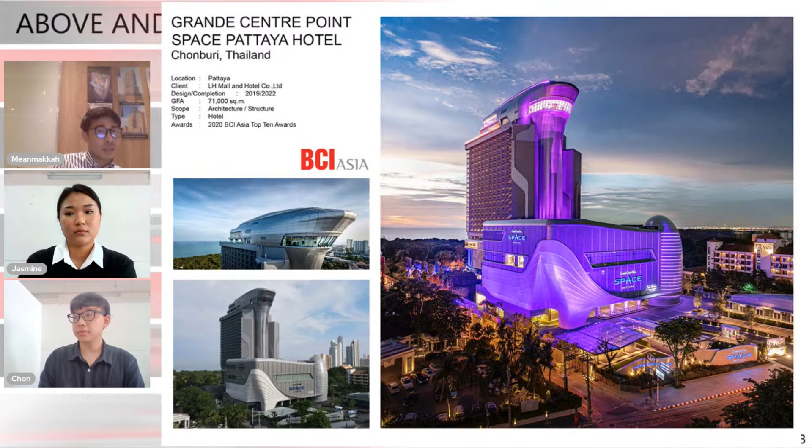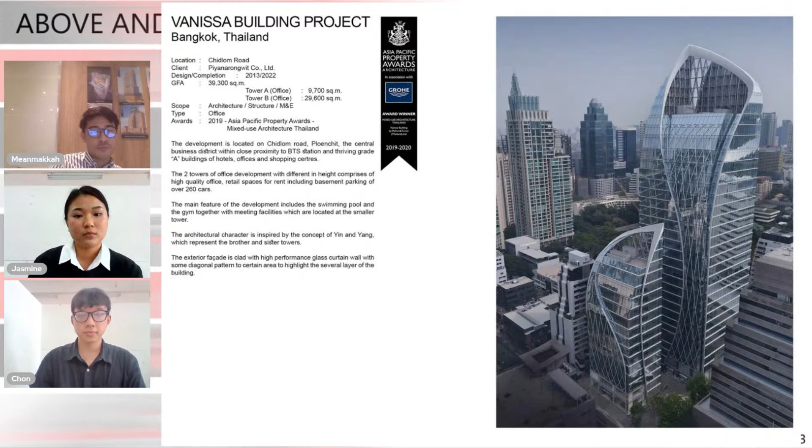As you see the projects of Palmer and Turner, I think approximately 90% are high-rise buildings in Thailand and overseas. This is a sample project that has been finished in Bangkok. This is interesting, right? Yeah, it is.

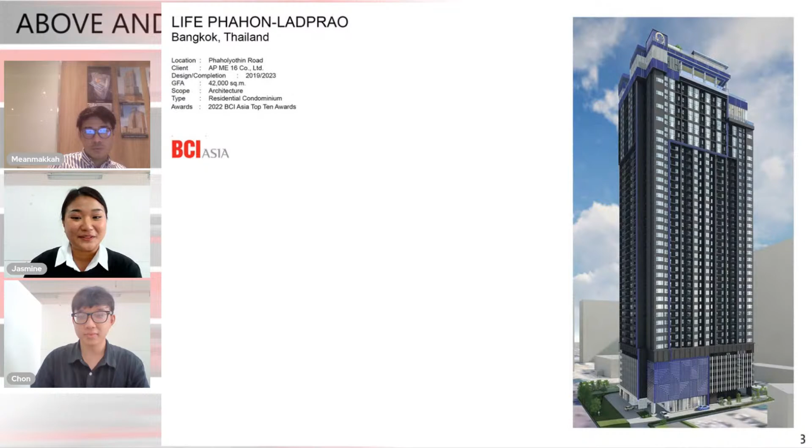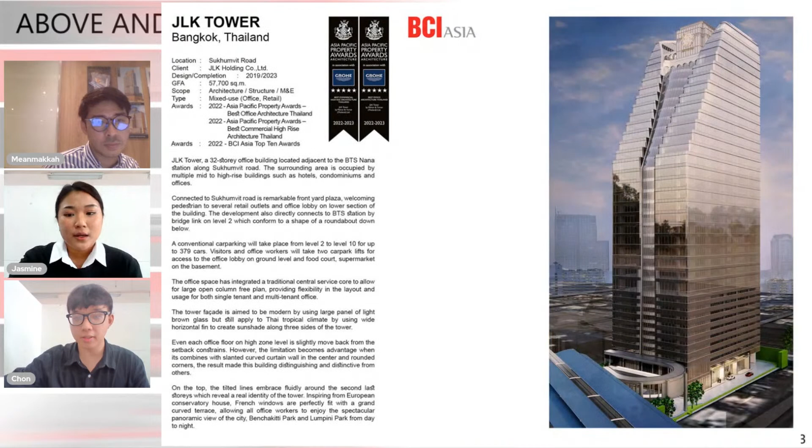It looks really amazing, such an interesting background, and I think we actually have a lot of questions to ask you today. Shall we start, Chon? Yeah, I agree with Jasmine. Let's get into our seminar topic, above and beyond. For me, I actually have a question. What actually inspires you to do high-rise building projects as an architect, P. Tom?

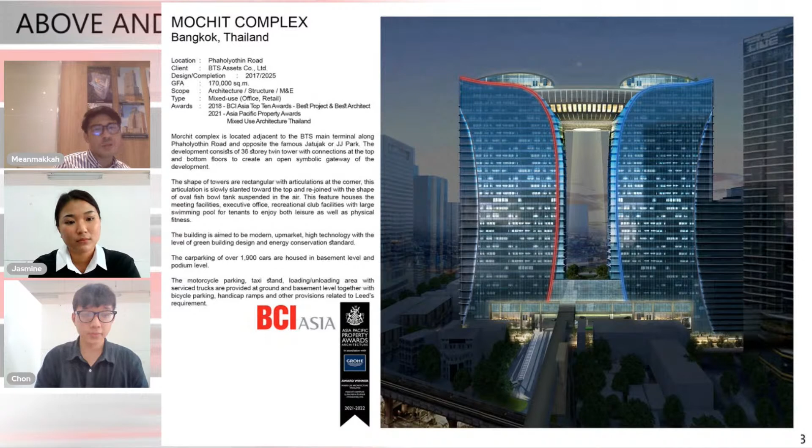Oh yeah, inspiration. So I had a lot of inspiration as an art student in architecture, but more for high-rise buildings. When I was a third year student in architecture, I went to Singapore on a field trip. I visited the One North site project, which is designed by Zaha Hadid. Everyone knows she's a legend. Yeah, that was interesting. But I was more interested in the high-rise buildings.

When I stood in front of the skyscrapers around Raffles Place in Singapore, maybe someone has already been there, it was huge and beautiful. The glazing facade reflected the color of the sky. I thought to myself, can I do that?

But how? What I need to concern about the high-rise building, the skyscraper. But I have already answered now. I already work with it, and I already built the high-rise in Bangkok, and maybe more in the near future.

Wow, it's like you have a lot of experience about that, in Thailand and abroad as well. So should we go to the next question, Chon? Yes. That sounds really extraordinary to me and sounds quite difficult. And lots of obstacles could occur during that project. And what about the unexpected problems, like delayed shipping?

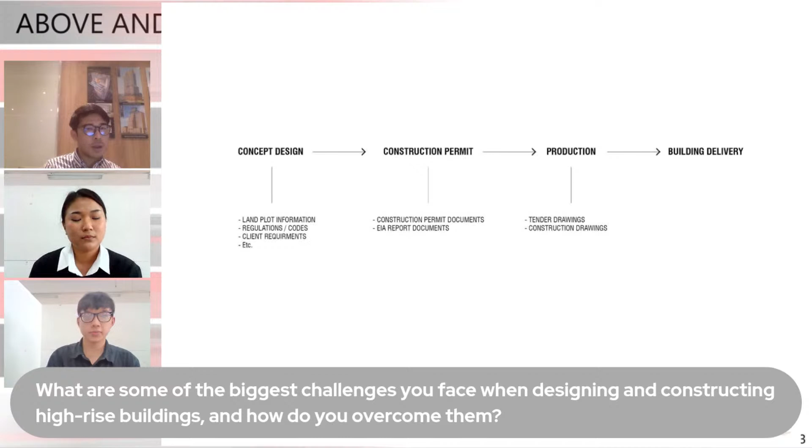So may I ask what are the biggest challenges that you faced with the design and construction of high-rise buildings, and how did you overcome them คะพี่ทอม? Okay, so I prepared my presentation. Maybe it suits the question. So for the design of the high-rise building, I need to present this slide.

The first stage of the design of a high-rise building is the concept design. We need to know about the land plot information in Thailand. In the land plot information we have the regulation. We have the client requirement, which function they need, maybe an office building, residential building or hospitality. After that we need to prepare the construction permit documents and the EIA report. This is important also.

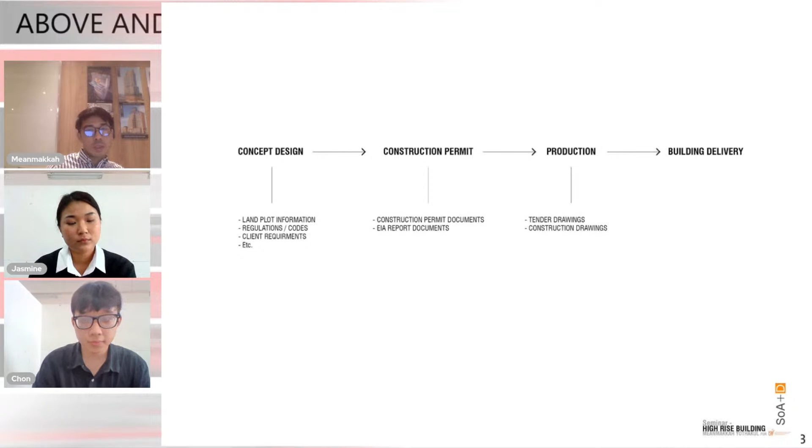And after that, the production documents for the tender drawings, which will be used for bidding the main contractor to build this high-rise building, and then the construction. It's also important to build the building. And after that, we finish the work. This is building delivery.

After that, we will talk about the land plot. The land plot, which concerns the urban code. We will know how many square meters the land plot can build, and also which function we can build.

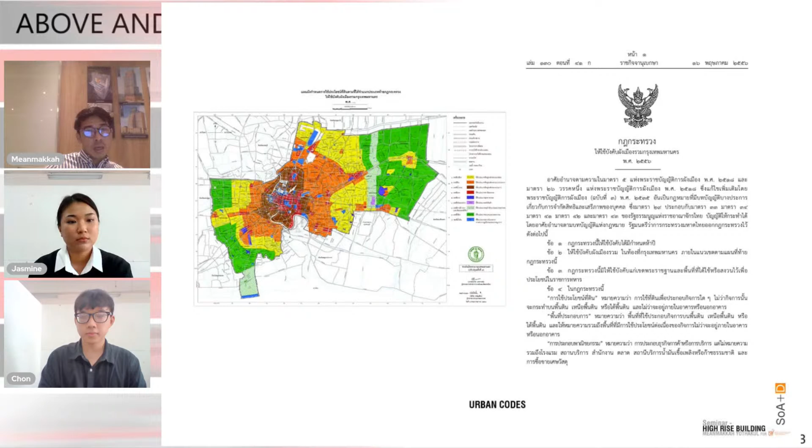And after that, I have a sample project in this slide. For this land, as you see in the slide, we have FAR in the urban code. It's 10 to 1. If the land plot has maybe 8,000 square meters, you can multiply by 10, and after that you will know how many square meters you can build on this land plot.

And after that, you have OSR, the open space ratio. On this site, we need open space for maybe green area, or the circulation of the wind, or the sunlight, something like that.

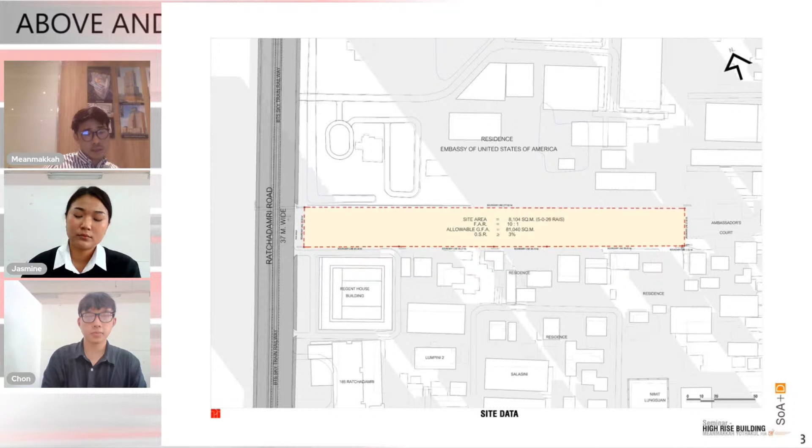And after that, building code. After urban code is building code. This is important also. We need to know about the code for the design stage: how many meters we need for the staircase, how many staircases we should have in the building, something like that.

For this slide, I need to present the setback of the building. It's also important in the building code. The building is here and the road is here. We need a 12 meter clear setback so the fire truck can go directly from the road to the building. And after that, we need 1/6 of the building perimeter for the fire truck to be close to the building, and a 6 meter setback around the building so the fire truck can go around the building.

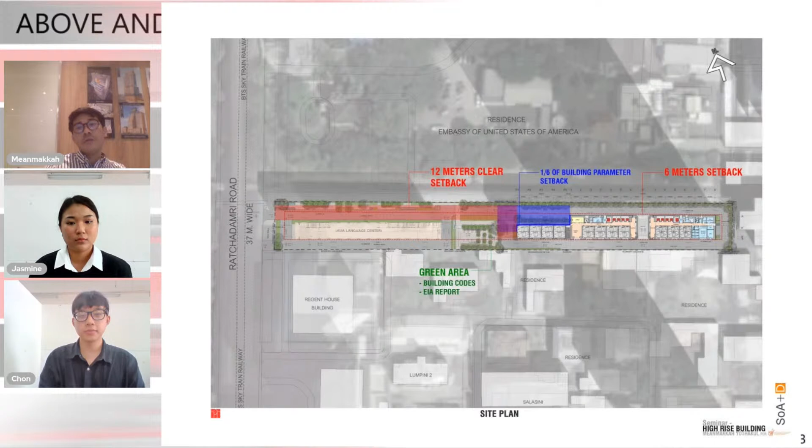And also for the EIA report, we need to be concerned about green area. There are two types of green area. The first is the sustainable green area, and the second is the water permeable green area. This is marked in the EIA report, and you will know more in the details later.

And also, we need a shadow setback. This is important for high-rise buildings, so that sunlight can touch the ground. So we need this shadow setback. We can build the high-rise building so it does not exceed the shadow setback.

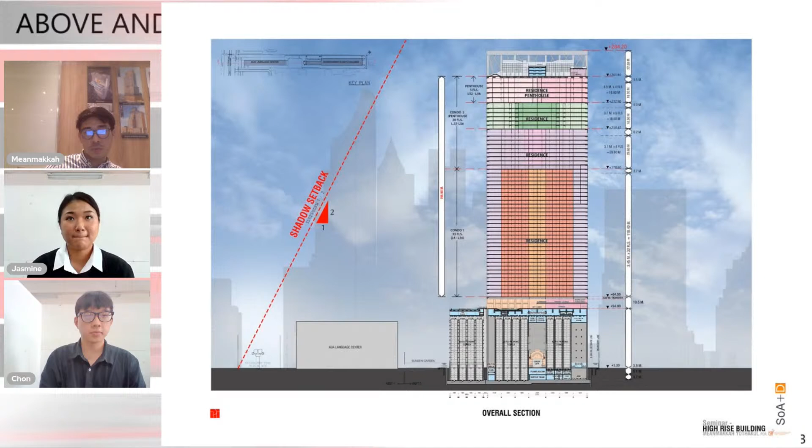And also for this slide, in terms of vertical transportation, this building has 8 passenger lifts and 2 fireman lifts. For the fireman lift, the speed requirement is 1 minute from the first floor to the top floor.

And also in this building we separate the lifts into parts. The violet one is the low zone and the high zone is in green, because the capacity of the lifts is different, depending on the function and the requirements of the case and the client.

And after that, we need to be concerned about the MEP transfer floor. Every 100 meters of building height, we need 1 transfer floor to transfer all of the pipes of the mechanical system, and also structure. The building has 1 floor for structural transfer and 4 transfer floors for the MEP.

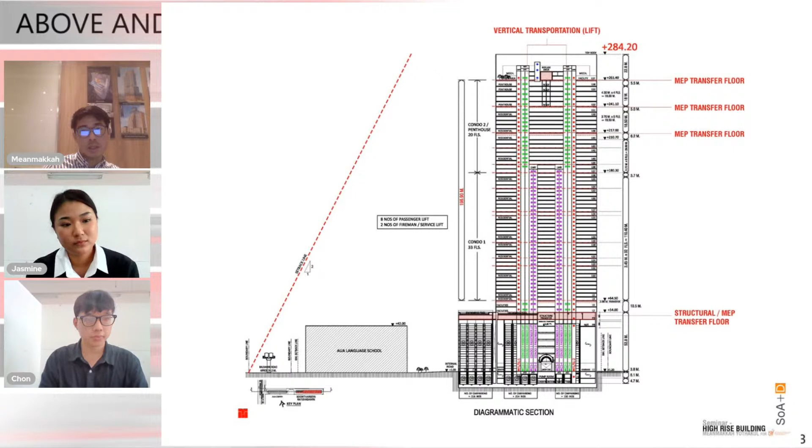And after that, we need the wind tunnel test. In Thailand, we have 2 locations where we can have a wind tunnel test. The first one, I think, is in Thammasat City, and the second one is in Chulalongkorn University. But in this project, we had a company in Italy do the wind tunnel test.

What is the wind tunnel test? If your building is more than 150 meters tall, we need a wind tunnel test. From the wind tunnel test, we will have results for the wind load that will impact your facade and your building. As we know, every part of the building has results. There is a number, and the highest number is the most impacted by the wind.

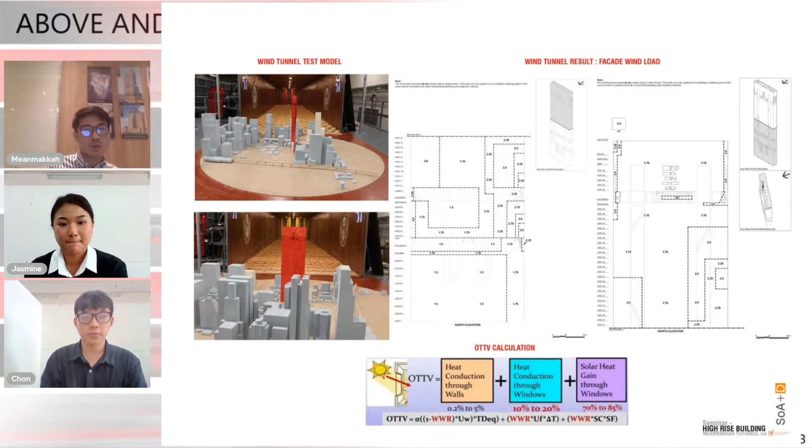So if your facade is glass, we have to specify glass for that part, maybe thicker or stronger glass. And also the wind load will impact the structure of the building. This shows how the wind will impact the structure. You can see the building will move in every angle, so the structural engineers will know to put more concrete or steel in some parts of the building to make it stronger.

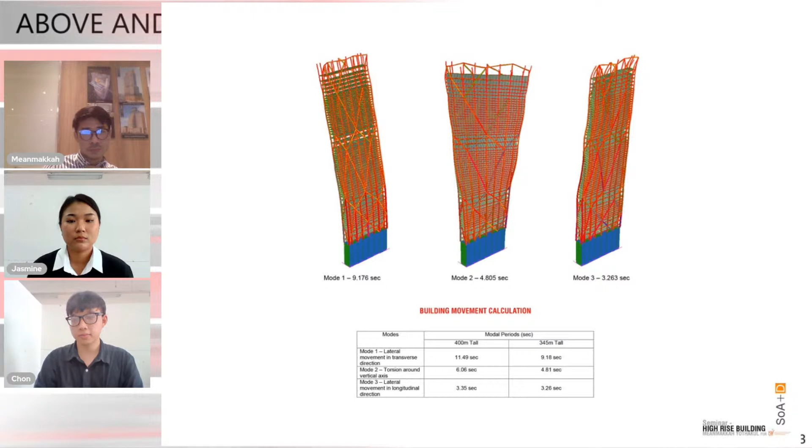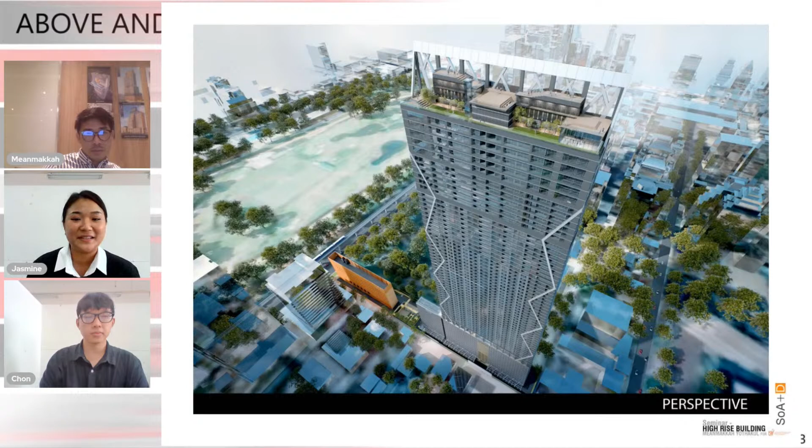Wow, it's really interesting, and thanks for your explanation. I can see the process of the high-rise building clearly in your slides. And it's really hard to handle, because you actually have to talk with people in many positions and work as a team, not just one person, to make it happen. A lot of things happen there, and it sounds so difficult. I can't imagine doing that project alone in the future. But listening to you, Tom, your explanation of the slides is so clear.

And another question: as architects, we always stay in charge of the design part. But is there another role for us to deal with?

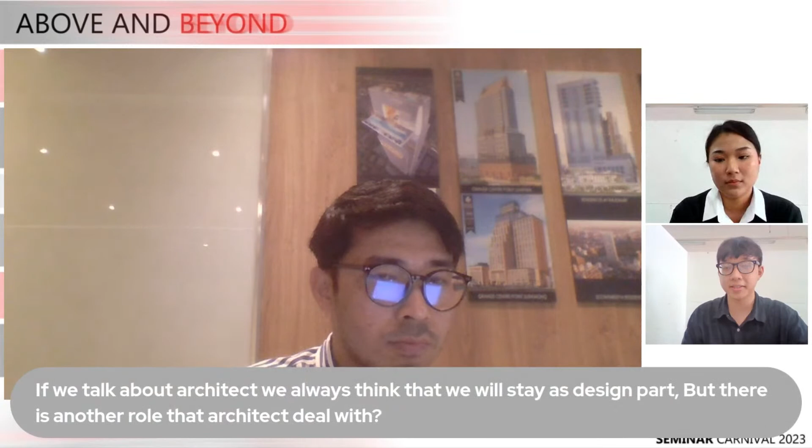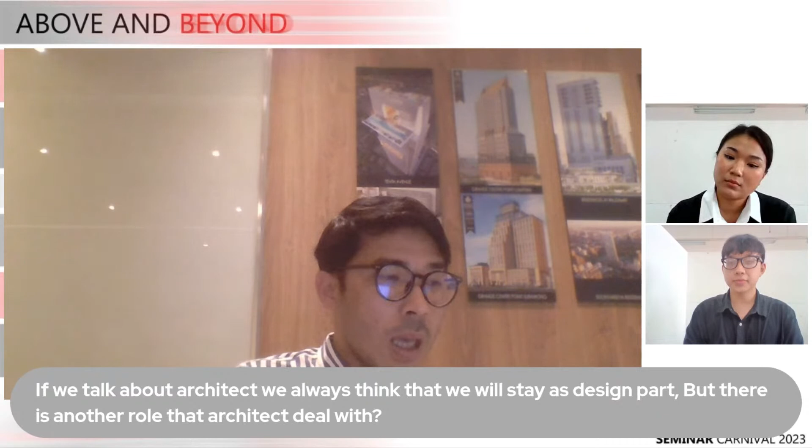Yeah, as we know, the architect is the first person or the leader of every building project, right? From the first step to the final stage of the building, the architect needs to be attached to all parts, like the design part, construction part, or other parts of the project. That means the architect must know all the needs from the client, from marketing, from structural, mechanical, interior design, landscape. We need all the information to design the most functional space. Also, the architect is like the coordinator in the construction stage.

The first drawing that the main contractor will check is the architectural drawing, the first priority. This drawing is from the architect, and that's because it's the combination of all information. So for me, the architect is not just a designer. The architect needs to be construction-law capable. The architect needs to know about all the codes and regulations and also the marketing. We need to know about marketing. Why? That's because we need to serve the people who will buy and use the building.

And the architect is like a combinator, the combinator of all information in this project, in all projects, and also like QC, quality control. We need to check every piece of the building, whether it's built like the architectural drawing or architectural design or not. And all of that makes the architect the leading role.